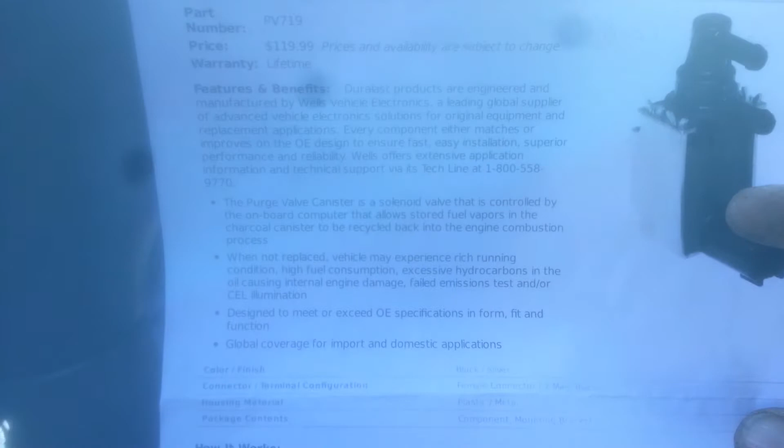I went to AutoZone and picked up the new part. Basically it's the evap canister control valve. The solenoid is in the open position, so I'm going to replace that in the engine bay, and let's get started and we'll take it from there.

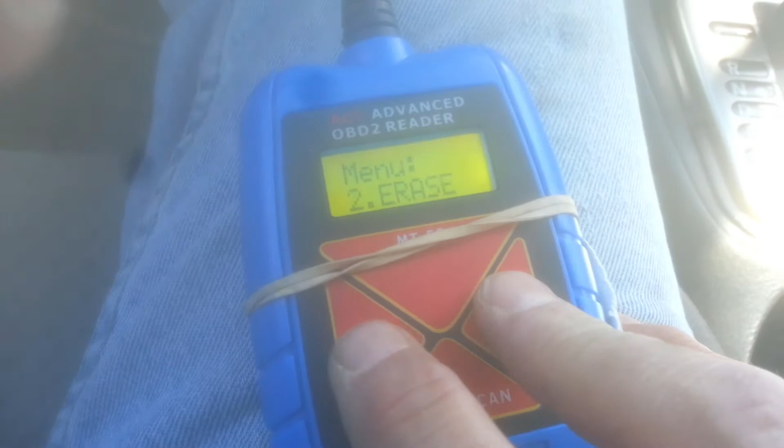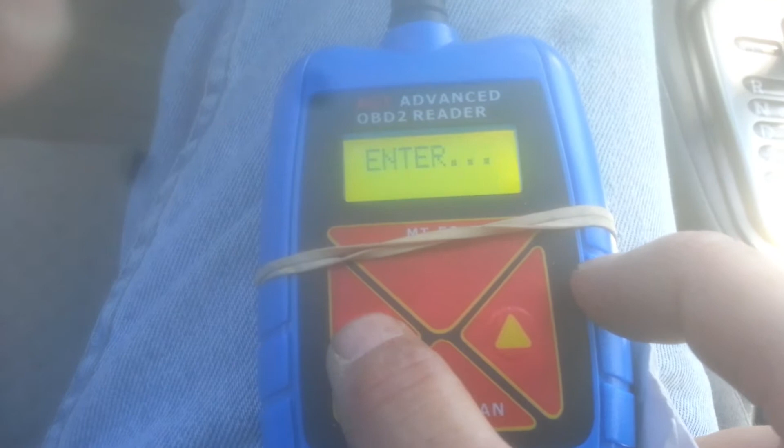The first thing I'm going to do is erase the code, so when we put the new part in, the computer will relearn the new part. Erase yes. And erase done.

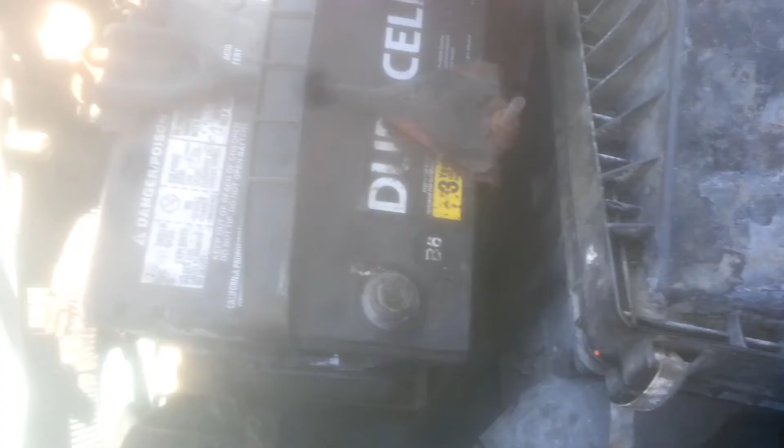Okay, now we'll turn off the car, unplug the scanner, and I'm going to disconnect the negative battery terminal. Okay, I disconnected the negative battery terminal. Anytime you're doing any kind of electrical work on your engine, it's a good idea to do that, just so you don't create a short anywhere.

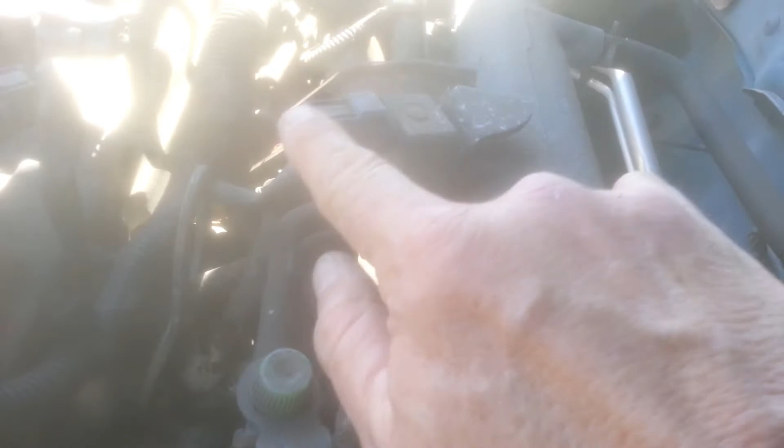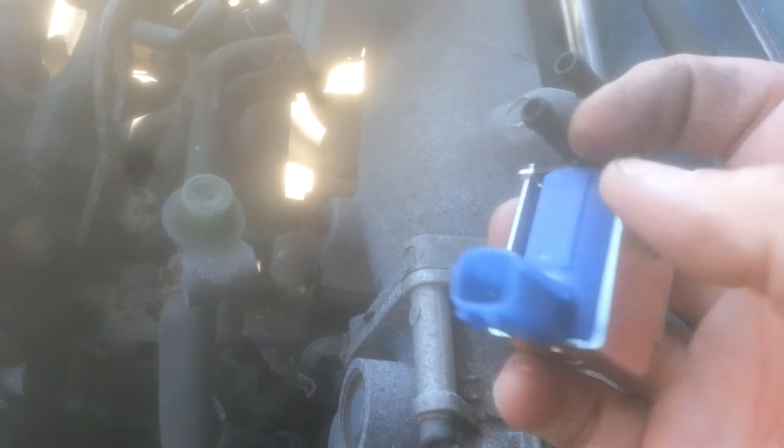This is the old part right here with the electrical harness. There's one bolt behind here that's holding it on, as well as these two hoses. This is the new part. A hose goes on each black piece, and then the harness gets plugged into this.

So I'm going to use a 12mm wrench to get that bolt off behind here. There's not much room to work with on this car. Where they located the bolt is kind of ridiculous, but we'll take this off right now.

Before you take that nut off completely, you want to loosen the clamps on each hose. Basically, you just get a pair of pliers, needle nose pliers or regular pliers, you just squeeze them together and slide it back this way.

Slide back. And I'm going to do the same on the bottom one. Easier said than done with one hand, but you get the idea. Just like that, and then you slide it back. And then we're just going to remove these two hoses completely.

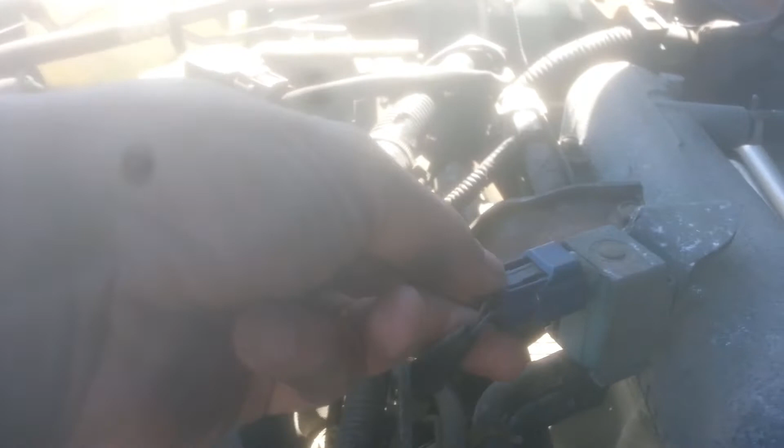Now what you want to do is remove this electrical harness. But remember, just remove your negative battery terminal off your battery. With this harness, you basically just push down on the blue tab on the end, and then it slides off.

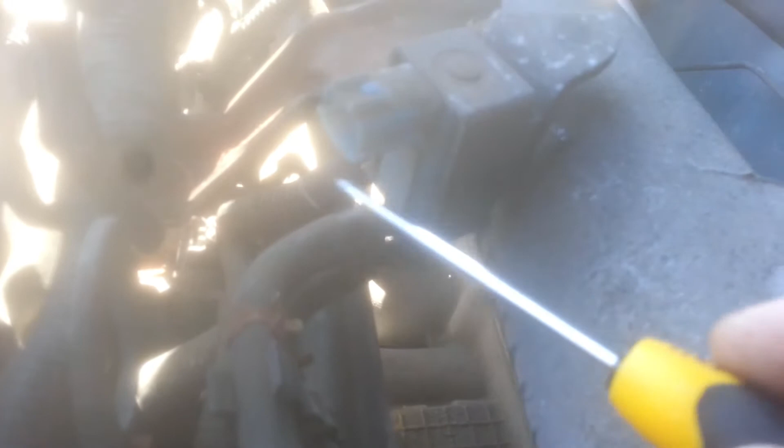Okay, now we're going to go and remove these two hoses. What I did with these hoses, I just have a small screwdriver, flathead, and I just used it to gently pry the hose loose because it was stuck on there fairly well. So those are loose, so now we can remove them all the way.

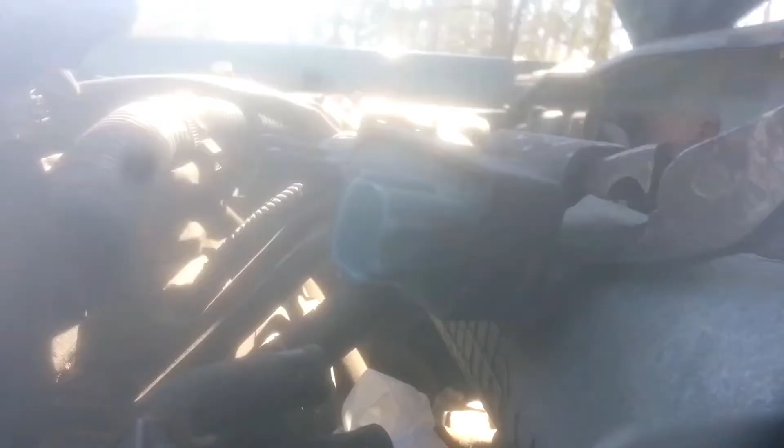And then we're just going to take off that nut on the back here and get this whole thing out. What I'm doing now, I have a pair of needle nose pliers that's holding the nut because I didn't want to drop it down into the engine bay. So I have a decent grip on that, and well, I did have a decent grip.

Well, and then I'm just turning the old piece. Oh boy, okay. I thought I lost the nut. It's almost off. There we go. Okay, that's the old part, and then there's the nut.

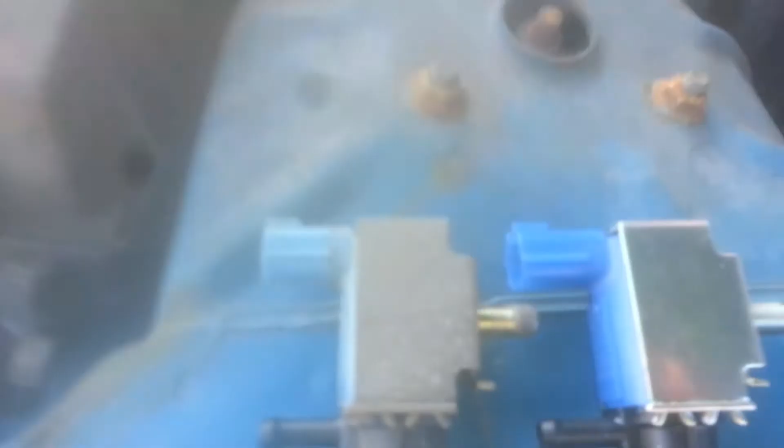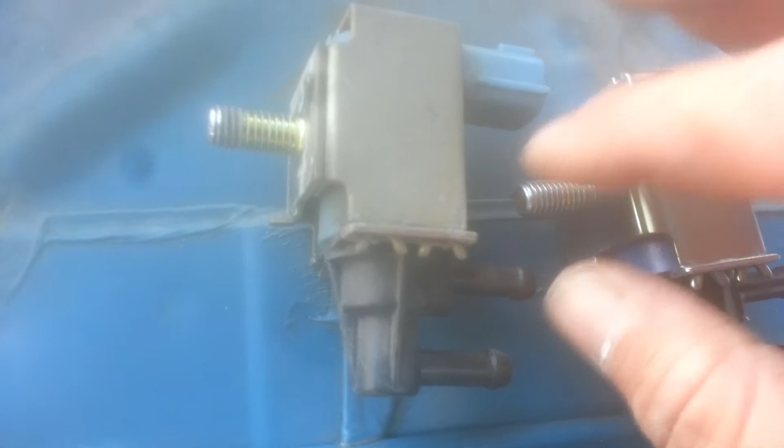Save that nut because you're going to need it to put on the new part. Then before you put the new part on, just compare the new part to the old part. Make sure they look the same. Two prongs on the inside on the new one. Two prongs on the old one. And it has the same area to screw the bolt on, or the nut, I'm sorry.

So that looks good. Okay, sorry there's a bit of a glare from the sun, but I have the new part through the hole in the plate. Now what I'm going to do is...

Take this nut and try to seat it, and then gently do it with my fingers, or my thumb anyway, and we'll tighten that as far as we can go. Switch into my pinky. Alright, that's fairly finger tight.

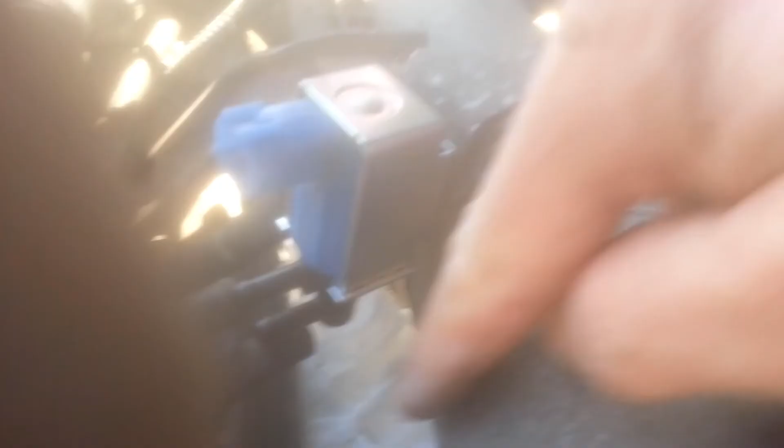What I did, I make sure your engine's cold if you're going to do this. I put a shopping bag down below here in case I did drop that nut. At least I'd be able to fish it out easier. But if you're going to do that, just make sure your engine's cold so you don't melt the plastic. Alright, now we're going to get the wrench and then tighten that nut down.

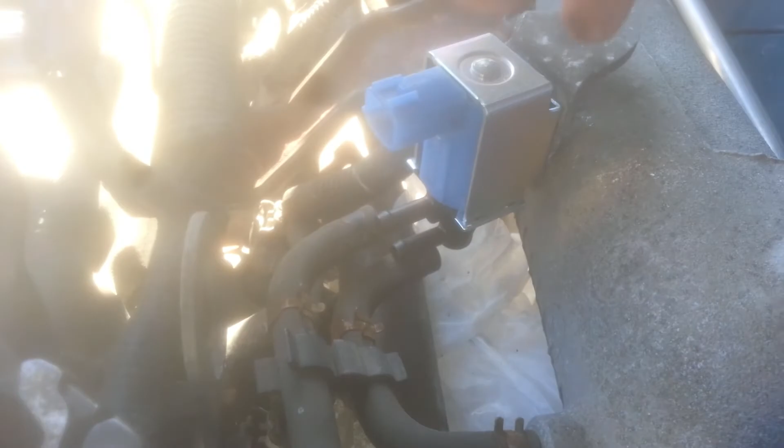Okay, we got that nut on as snug as I could, because like I said, there's not much room to work with on this car where they located this. Now we're going to take the bottom hose...

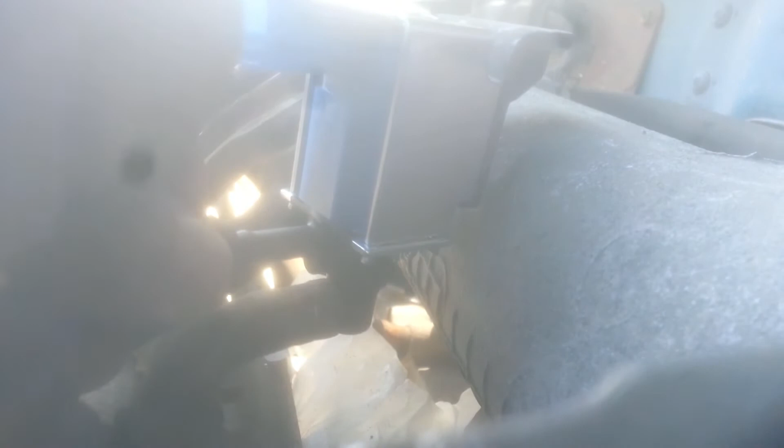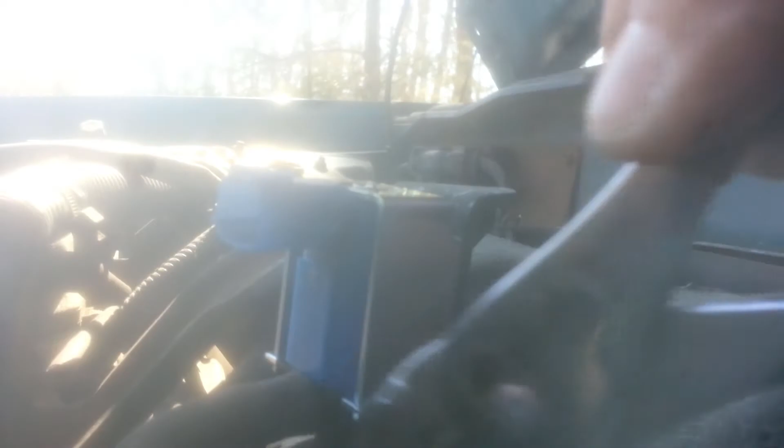And put it back on, and then the top hose, and that just slides right on. We're going to use our pliers to get the clamps back on, and just leave the clamps at an angle that if you ever have to replace this again, it's easily accessible.

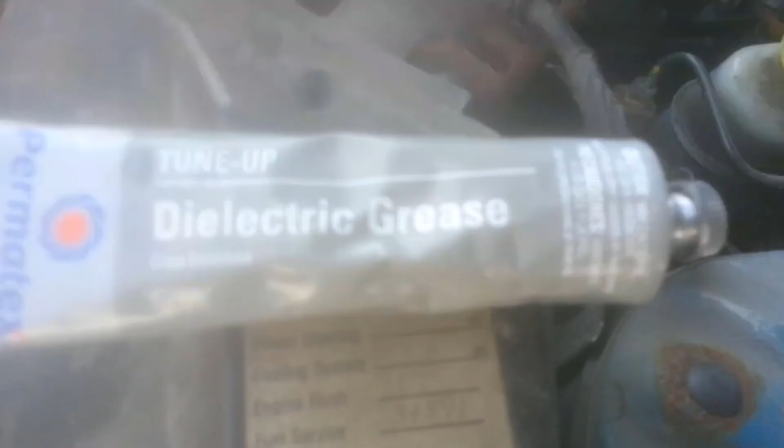Okay, now that's done, and now we can plug in our wiring harness. I like to use dielectric grease on any electrical connection, so I'm just going to put a dab on this connection. So let me do that now. This is the dielectric grease.

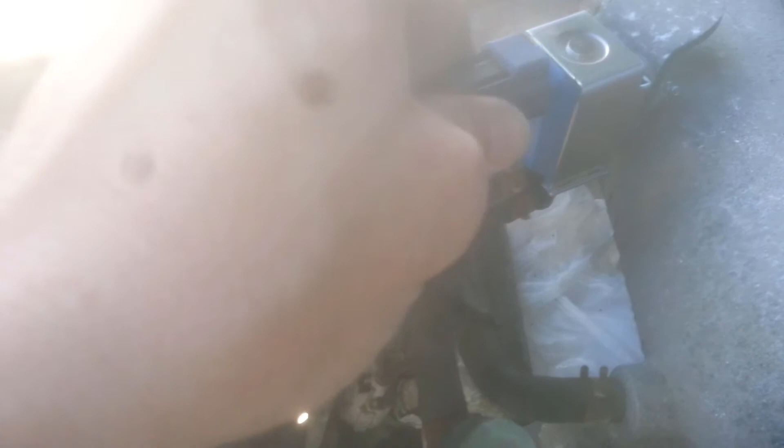You just need a dab. Not much, just a dab. And then we are just going to put it right on where the connection meets. It's just a little bit. This helps repel water, and it also helps with the continuity of the electrical connection.